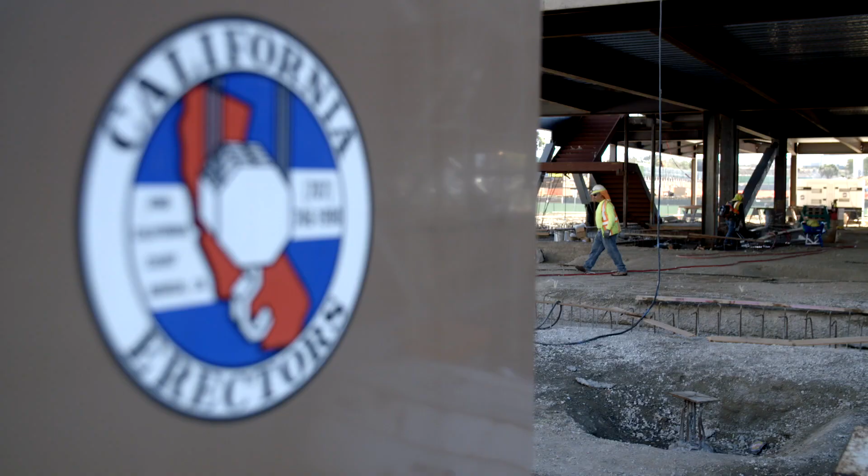Because we have been around for over 50 years and because we are a third generation ironworking family, we know what actually occurs in the field. One of the things we take great pride in is being one of the safest and most progressive companies in the industry. We organize a safety plan for each project by coming out to the sites and visiting with the crews. The job sites are continually changing, so what might work at the beginning of the project is no way what it's going to be like at the end. So unless you're able to communicate effectively throughout the project, along with the people and the flow going in and out, you're not going to have a good program.

We really try to get the people that do the right type of work for us. We invest very heavily in training with them to make it safer, sounder, and more efficient.

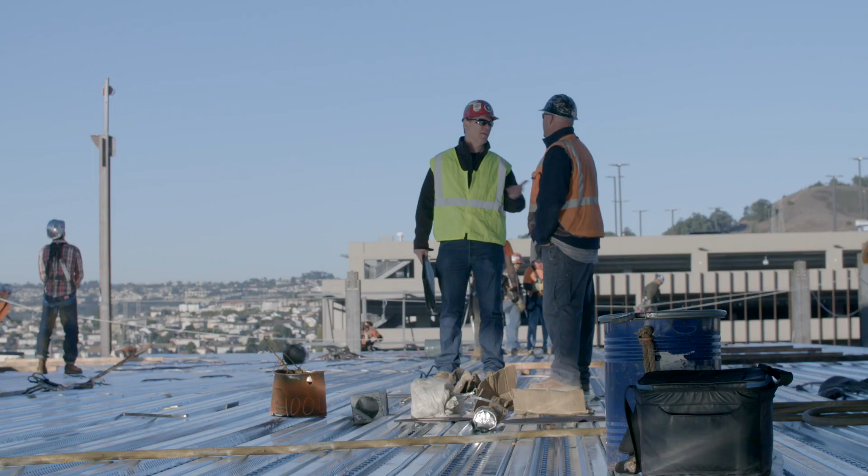One of the things I believe is unique about California Erectors is our site superintendents have extensive experience in all facets of steel erection. Ultimately, the superintendent is responsible for all site safety and will be the person that ensures all the procedures are followed.

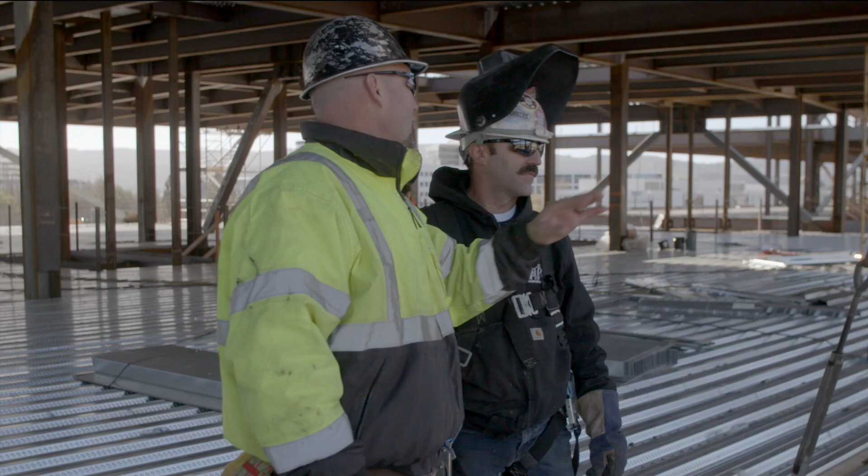My name is Sean, I'm one of Cal Erectors' superintendents. My job is to oversee the whole project, to make sure the job is on schedule. Obviously our goal is to be the most productive company around. We do it the most safely and the most efficiently as possible.

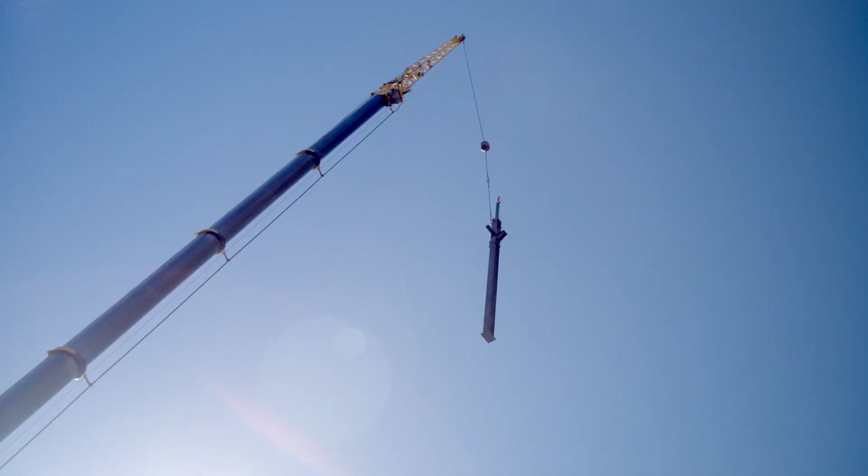When we get on the job, we say, where's the crane going to be and where's our shakeout area going to be? We need level ground, we need a lot of room. Iron's big, we have big machines. The tighter the space is, the more room for error and the more room for possible injury.

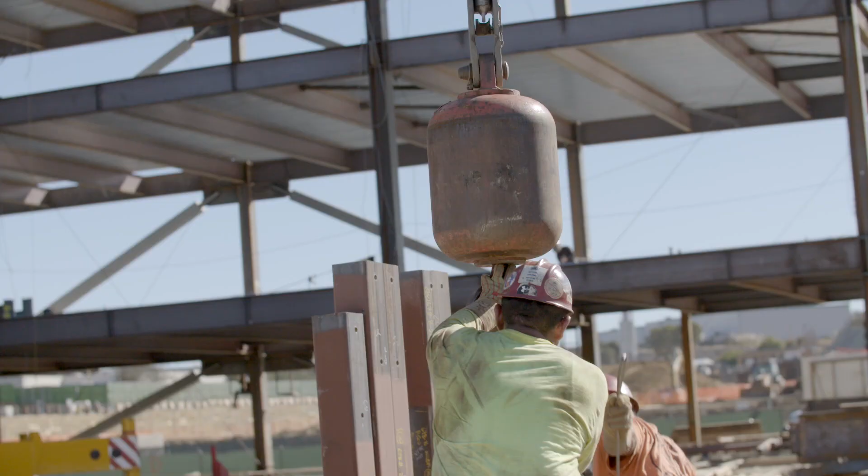If people start coming into our area, it really diverts our attention off of our task. A lot of these other trades, they don't think the way we do. They don't know that's a dangerous spot to be in. We know where to stand, we know where our placement should be. So we don't want anybody around our area that's not an iron worker.

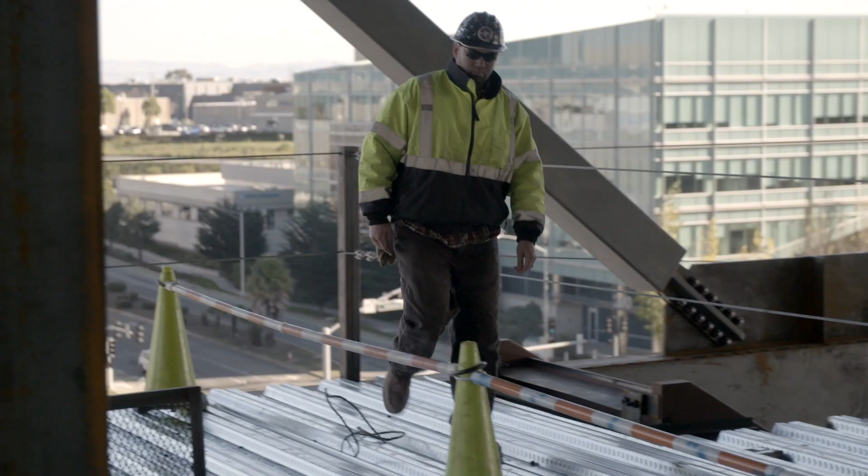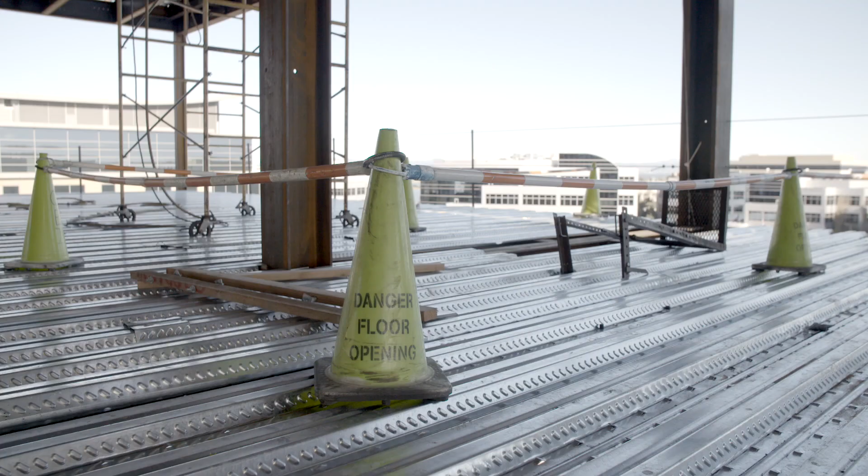Every job site is different. When we walk the floors, we're always looking out for safety, one of the most important things, hazards around that job site. The cone zone is basically if there are any open holes, tell somebody that there's danger. They're bright, the horizontals are orange, it stands out. So we want to make sure that spot is always safe for anybody else walking around.

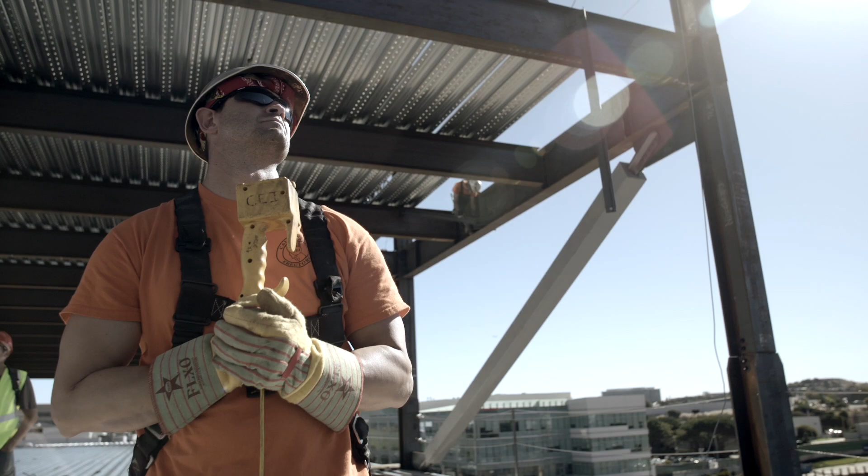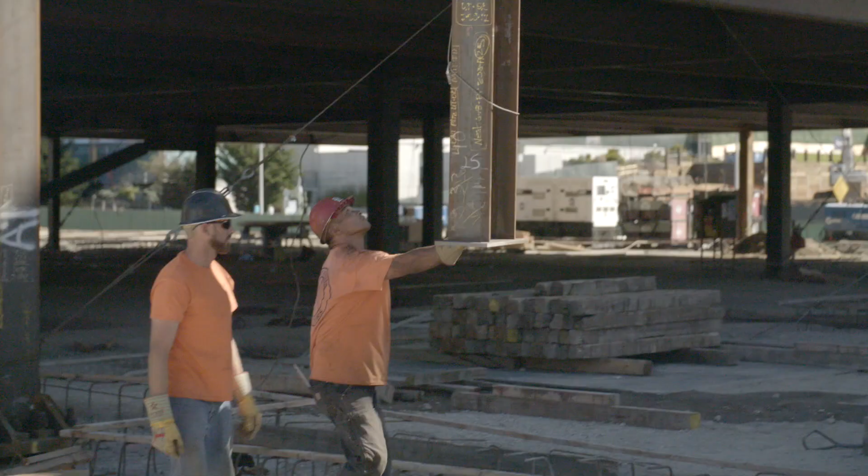My name's Andrew Cosby, my role is raising gang foreman. Raising gang are the group of men that put the building up, that actually hang the iron, that send it from the ground up, that unload the trucks. That's the raising gang.

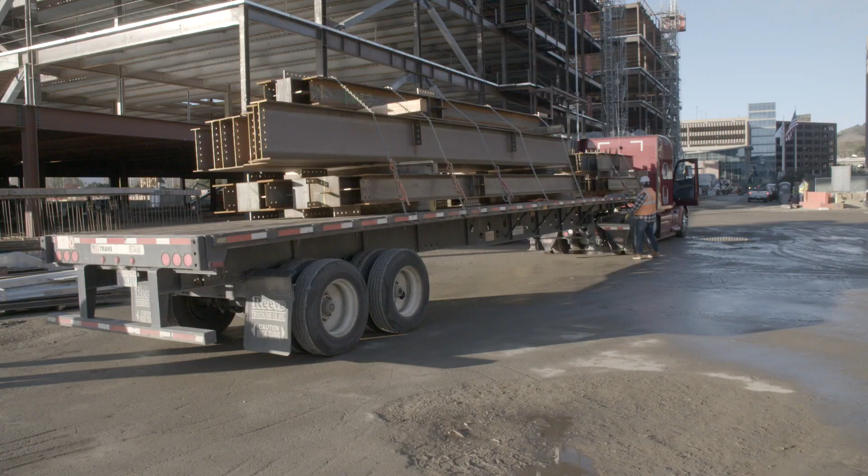We want a big enough laydown area that we have room to take multiple trucks, not 2, 3, but a lot of trucks, and we have a safety factor in doing that. Trucks are very dangerous, that's one of the worst things in our trade, because all it takes is a little tap with the fork and it will all come right off the backside. We don't want anything collapsing on anybody. We try to keep everybody out of our zone for that reason right there.

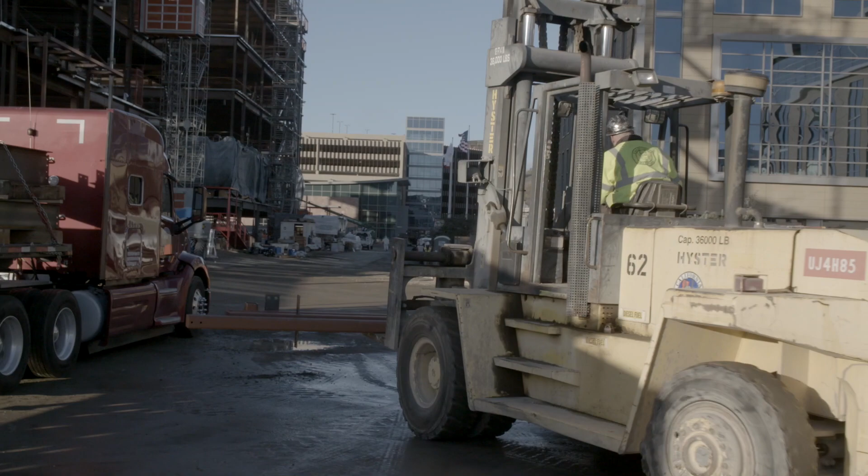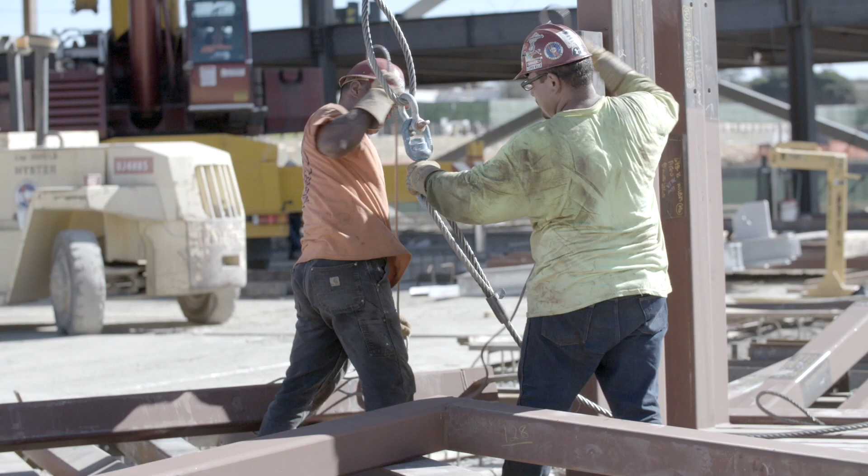The way that we hang our iron is way more efficient, way safer. You have to number the iron, so the guys on the ground, your hook-on men and your tag man, those are the guys actually hooking the pieces up to the crane, so they know which pieces to send up at a time. It's very important because one number being off can totally confuse people.

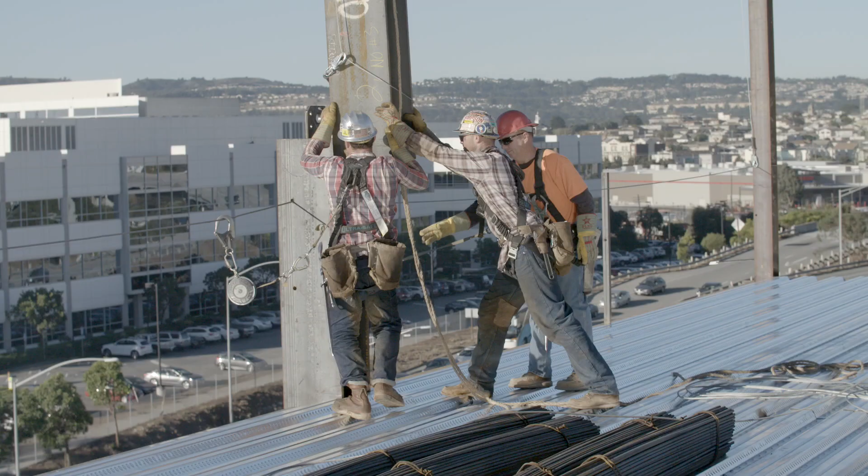Like on a building like this, you have a guy up on the building that's a phone man, and he tells the crane where to go. Because the phone man knows exactly which piece is going where, because we work in a certain way on every building. It never changes, everybody knows which way we're going. There's no confusion.

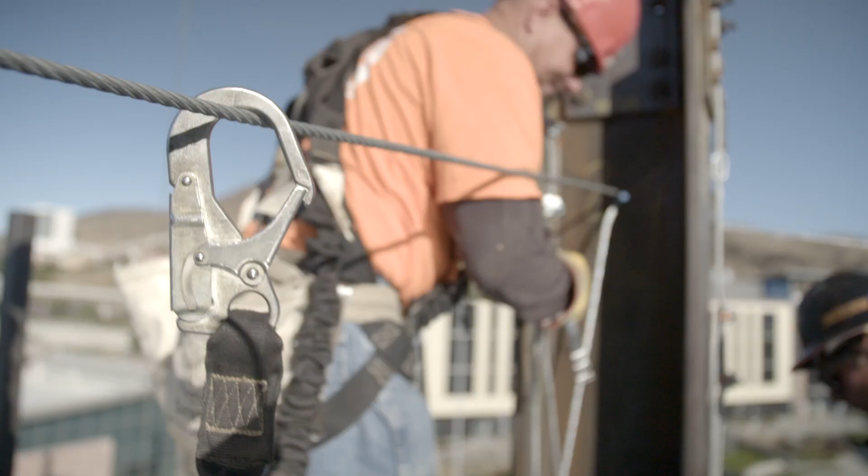Safety is one of the most important things we do as a company, and we've made a few recent changes. One change this year is to make sure we're 100% tied off above 6 feet. To do this, we have an engineered plan.

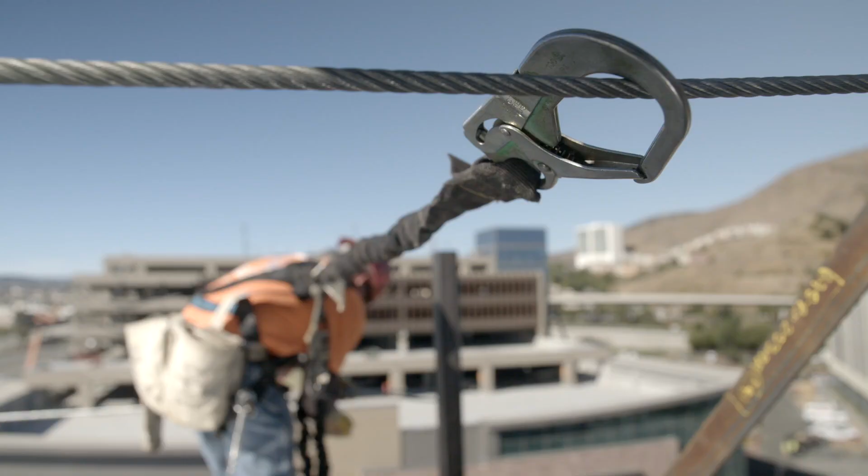We've designed a system proprietary to California Erectors that utilizes a 3/8 inch diameter galvanized safety cable with a breaking strength of 14,400 pounds. We also make extensive use of 900-pound shock-absorbing lanyards, which connect from the harness to the actual safety cable.

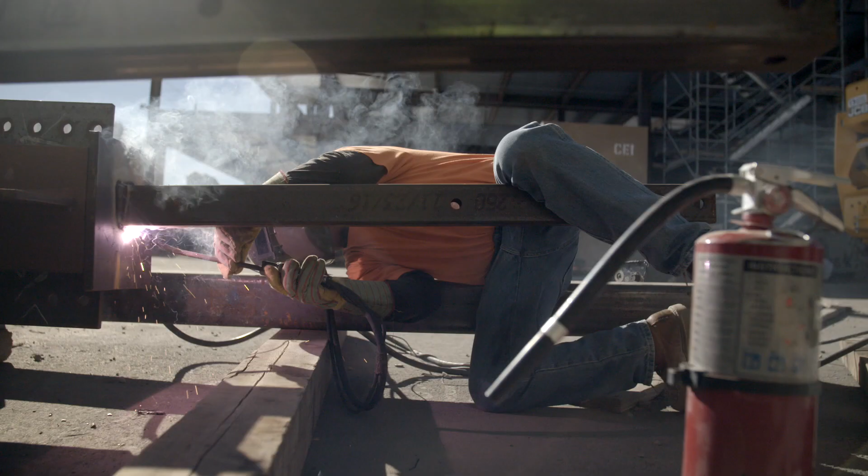This is important because to have safety cable in place, many times we have to weld a column post on the ground to the top of a column cap, which in turn connects a 50-foot safety reel that goes from the top of the column to the bottom of the base plate.

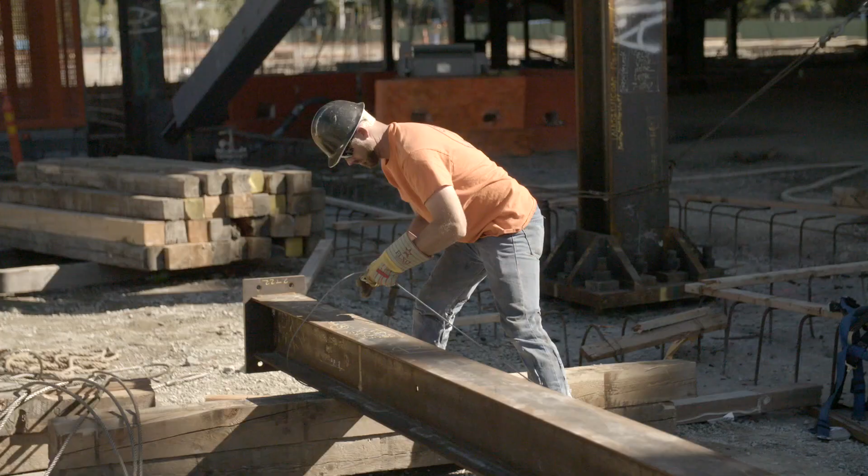The reason that's important is that when that piece gets erected, the safety person has the ability to tie off at the base plate and can climb the column to locate and pull safety cable up through those areas.

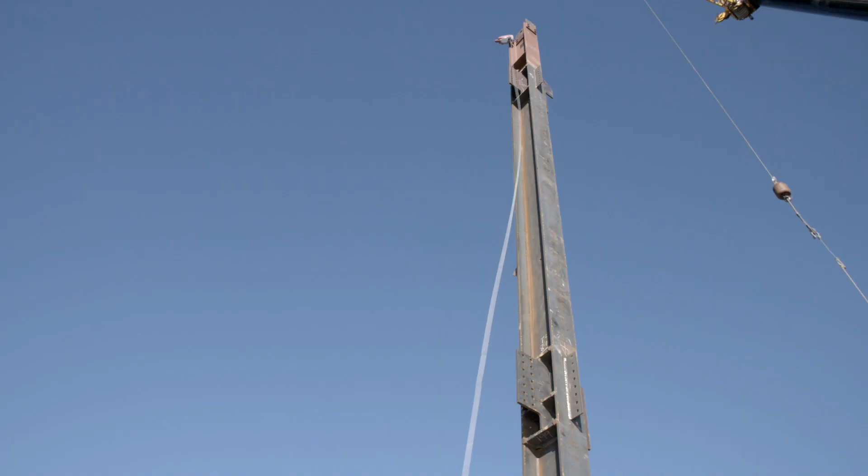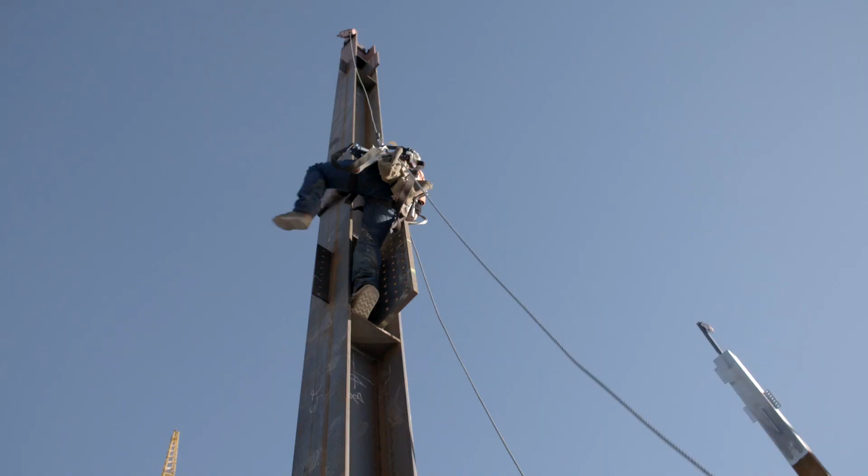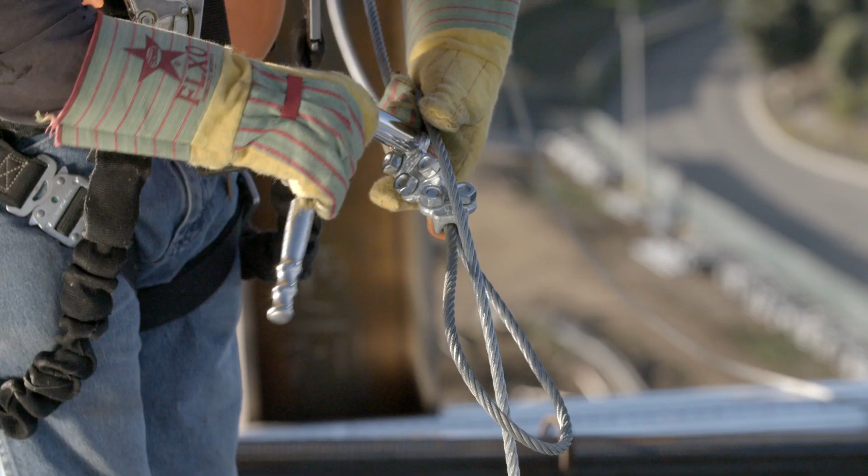Each column has holes drilled by our fabricator specifically for our safety cable program. As the iron worker on the column threads the cable through the holes, another member of the safety crew secures the ends with 3 drop forge clamps and then pulls the system into place.

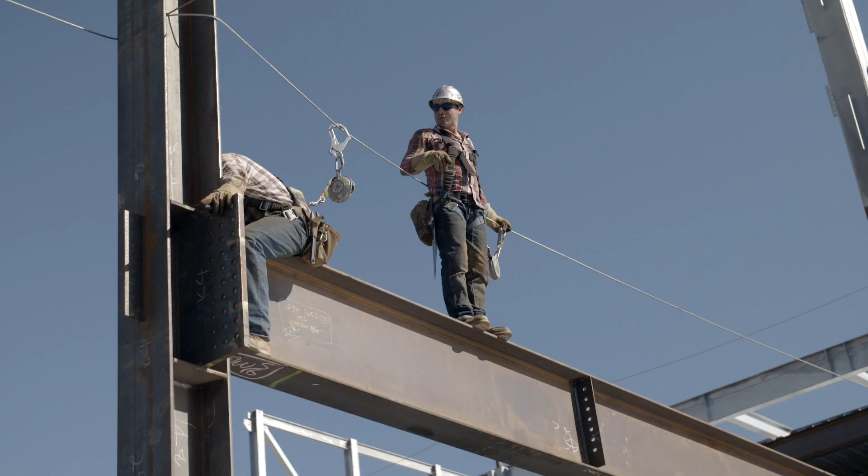The purpose of the safety cable runs is to provide a means of tying off for the connectors when they are installing beams and girders.

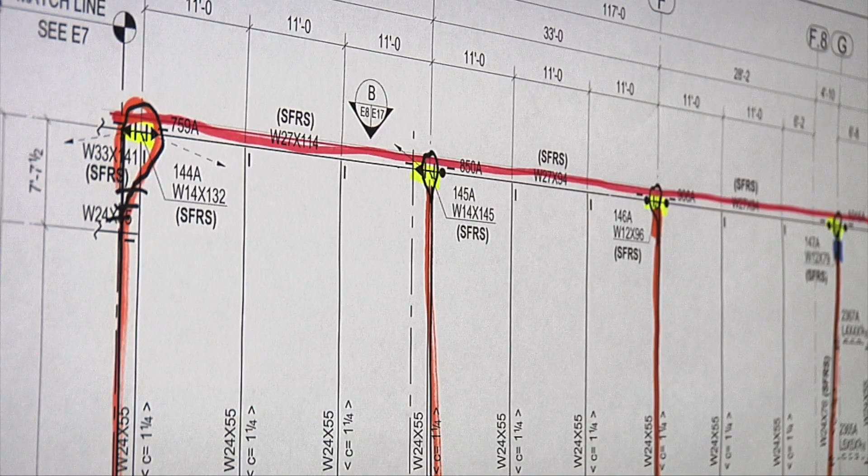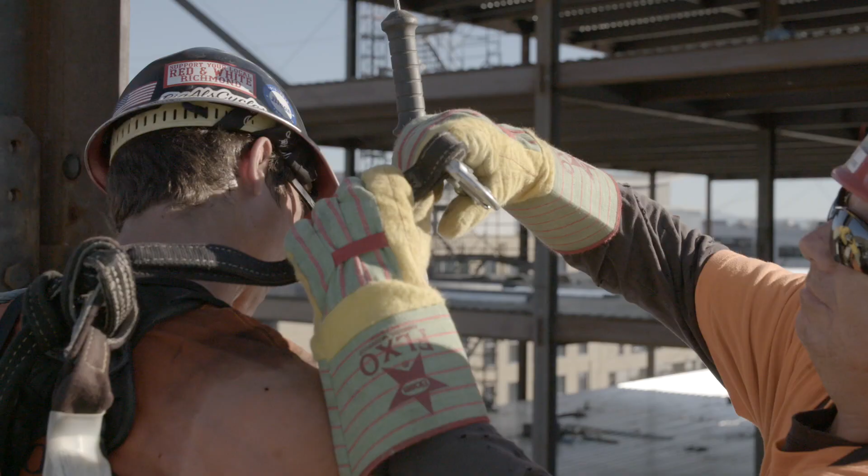One way to explain this is to look at a set of steel erection drawings which show the building in plan view. You can see where the columns are actually located. They're erected around the perimeter and also on the interior in any given area. Once the columns have been installed, a member of the safety crew at any location can tie in, climb the column to the area he needs, and then install safety cable.

The safety cable becomes a grid-like system where the connectors can go anywhere along that grid and have safety cable in place to allow them to tie off.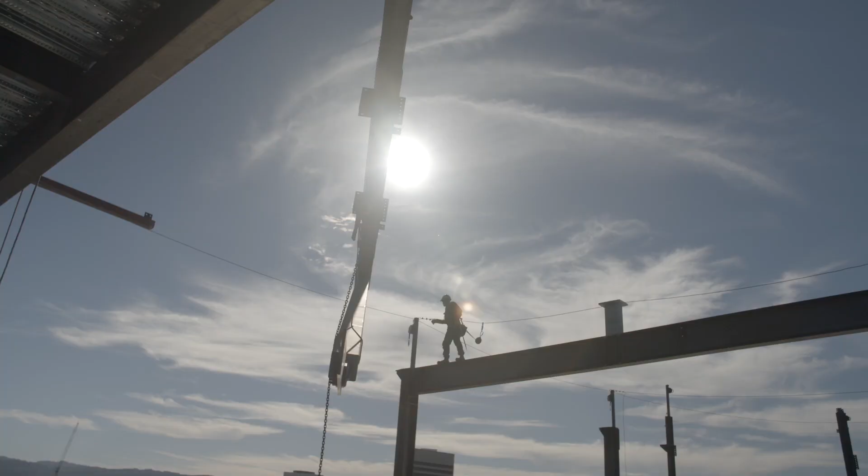We don't hang any iron until the safety is fully secured. All the safety is through all the columns, it's boxed, through every single column in a bay, so you have an access point to tie off to at all times. Then we can go to work.

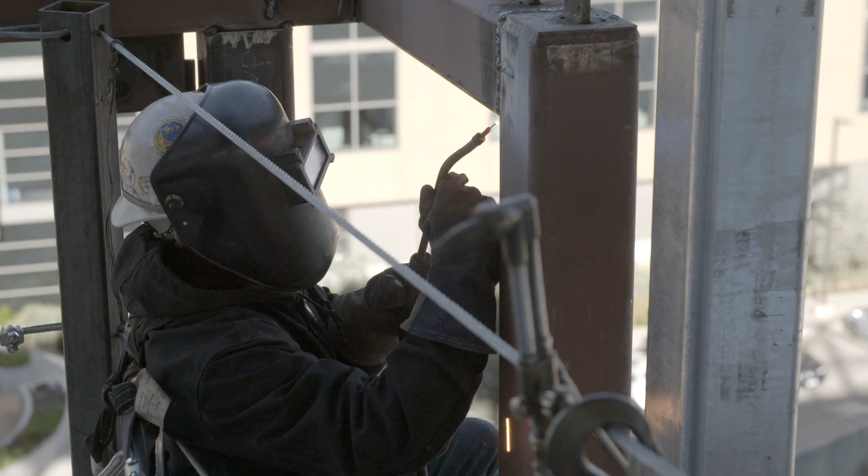Once we have completed our work in this particular area, the bolting and the welding can begin. Also during that time, we will install safety cable around major openings.

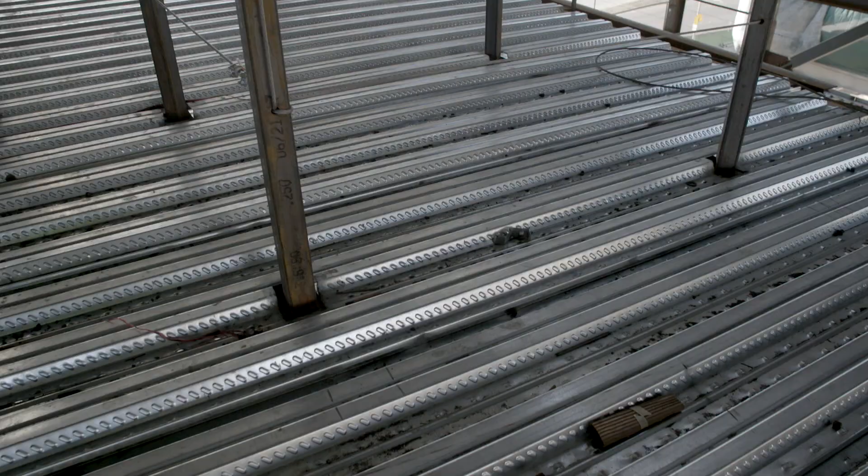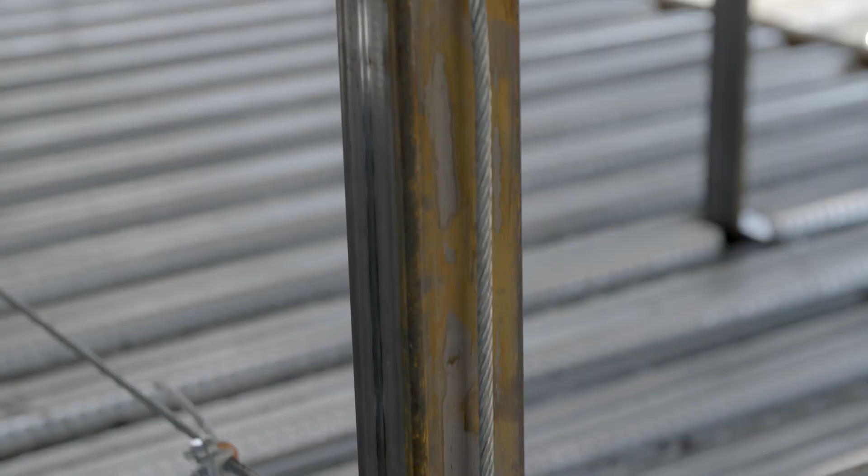Here's an excellent example of the safety cable system California Erectors uses. We have 4 corner posts installed at this location, each a 3.5 by 3.5 by 1/4 inch tube steel. We use 3/8 inch aircraft safety cable with 3 drop forge clips, which is more than what's required, but that's the standard for Cal Erectors.

The reason I like to show this example is you can see the hole has not been cut here. So Cal Erectors has installed the actual safety system around the opening. Now the decker can go ahead and cut the opening, creating no hazard because the safety is already installed.

Once the floor is complete and we've finished our work and are ready to turn it over to the general contractor, several things occur. We go back and tighten up the perimeter safety cable, and install the second line, which we call a mid-rail.

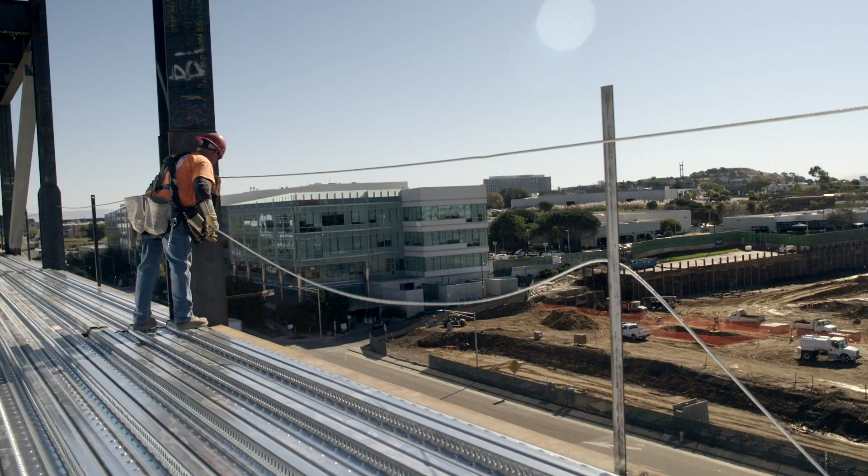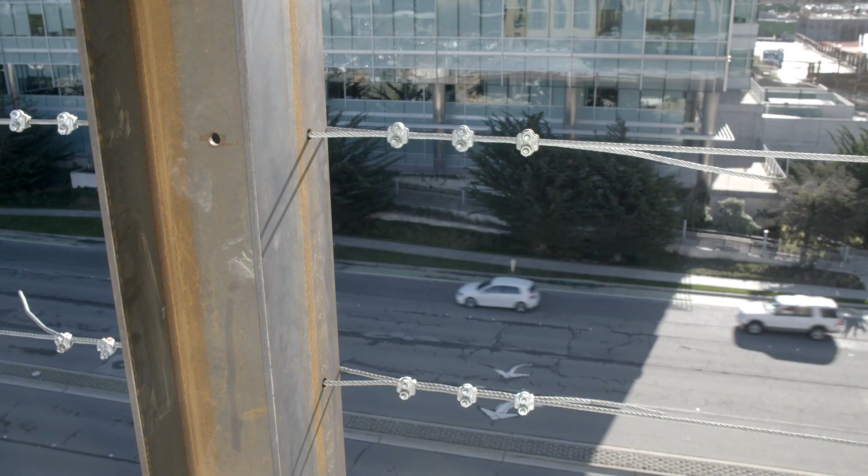So the floor around the perimeter has 2 lines of safety cable. I'll walk the floor, make sure all the cables are tight, and make sure we have 3 clamps on. It turns into a guardrail. Then I'll turn it over to the general — all of my work is complete and I don't need to be on the floor anymore.

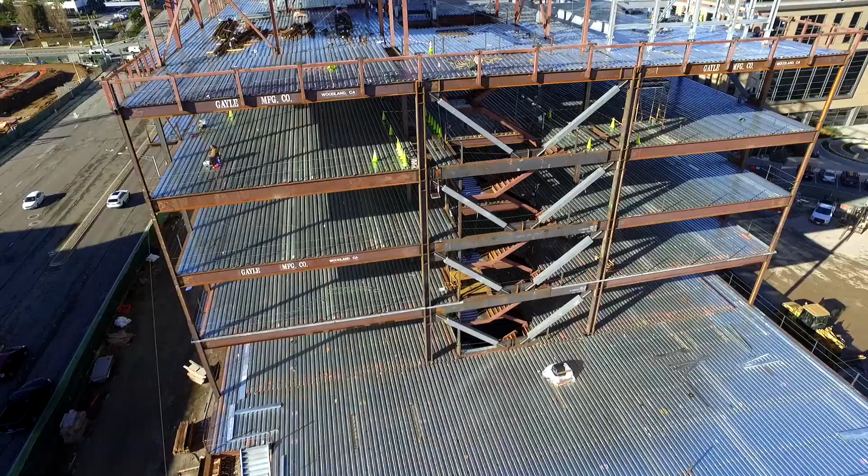We always look out for each other. You mean something to us. We do work hard, but our main focus is to make sure everyone goes home safely that day. Cal's a real family-oriented company.

One of the things we continually try to do is get better. As safety evolves, so will we. And that is one of the reasons why I believe California Erectors is one of the safest companies on the West Coast to do the steel erection for your project.